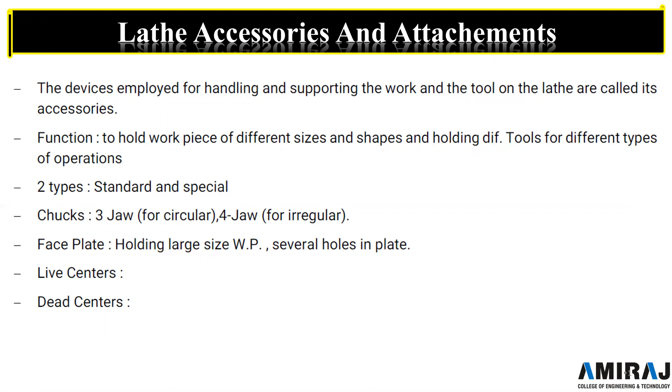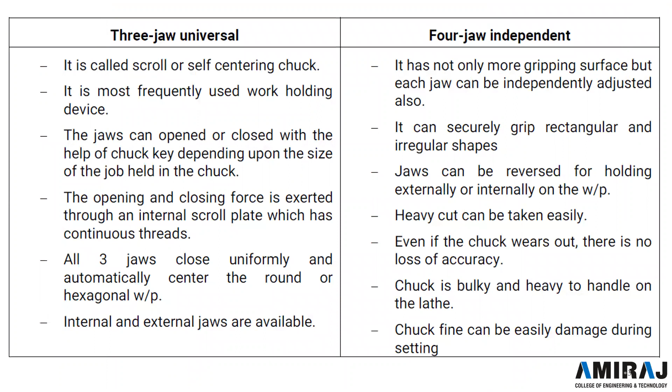In the previous lecture we started the new topic in this chapter, lathe accessories and attachments. I discussed the introduction of lathe accessories, what lathe accessories are, and we were discussing the chuck and explained the 3-jaw, 4-jaw, magnetic chuck, and the collet. I also explained the difference between the 3-jaw and 4-jaw chuck, then the magnetic chuck and collet. Up to this I explained in the previous lecture.

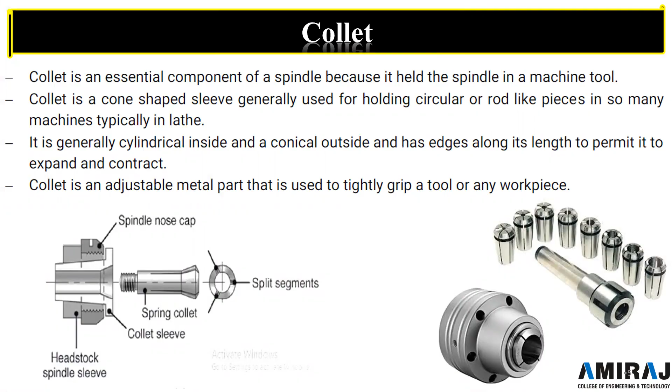Now we will start with another lathe accessory, that is the faceplate. It is usually a circular disc, a circular cast iron disc having a threaded hole at its center, so that it can be screwed to the threaded nose of the spindle.

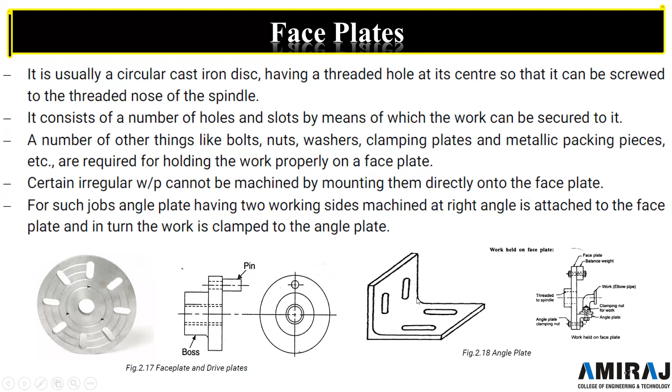This is the faceplate, the threaded spindle, then this is our workpiece, which is a type of elbow. We want to machine this face, but we cannot directly mount it on the faceplate, so that's why we have used this type of angle plate. You can see this is an angle plate which can be fixed.

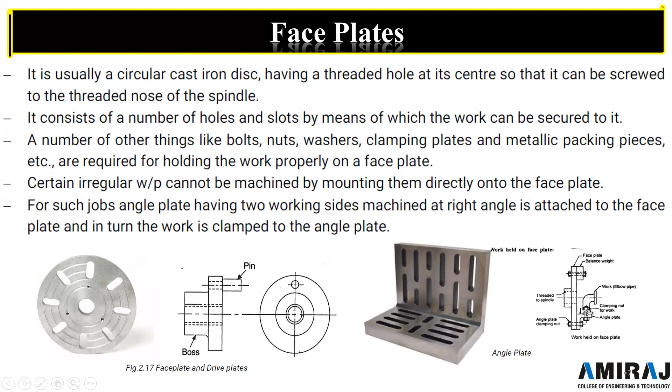So in this way, irregular workpieces which are not possible to mount directly on the faceplate are mounted on the angle plate. So this is about the faceplates.

Next, there are lathe centers. Okay, these are the lathe centers. You can see they act as solid bearing to support the work during operation. The lathe centers are used to support work during operation. They act as solid bearings.

Cast steel or high grade tool steel is commonly used material for their manufacturing. The lathe centers are made of cast steel or high grade tool steel. They are then hardened and ground to correct angle.

Now has opening to receive work and set screw to fasten the dog to work.

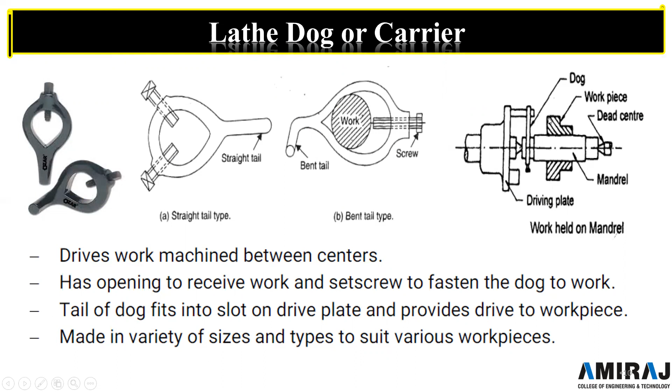And the next part is the rests. You can see when a very large job is to be turned between centers on a lathe, due to its own weight, it provides a springing action and carrying a lot of bending moment.

As you know, a metal material contains its own self weight, and when the length of the workpiece increases, due to self weight, bending moment is acting. So due to that, the component will try to bend, and the axis will not remain same, it will be moving. Okay, so the result is that the turning tool is spoiled very soon,